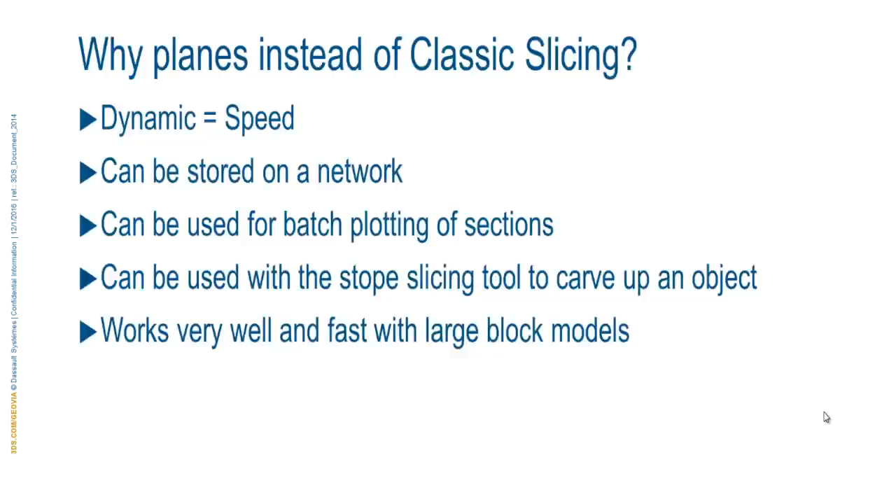On top of that, we have the plane's menu bar. Most of the options you will need when working with planes are on the toolbar, but there are a few planes functions hidden away in the planes menu that will also come in handy. The ones we'll look at today are the 3D work area.

Once you've defined a plane, the 3D work area allows a 3D grid to be drawn around any data currently open, and will also show us the active plane, which can be seen as a translucent object. This makes it very easy to see where the plane intersects with your data.

Another option we'll look at is create parallel planes. If you're creating oblique planes, you first need to define the oblique plane that all other parallel planes will be based off. Once that's done, creating the rest of the oblique planes is easy with this function—you just need to nominate how many parallel planes you want.

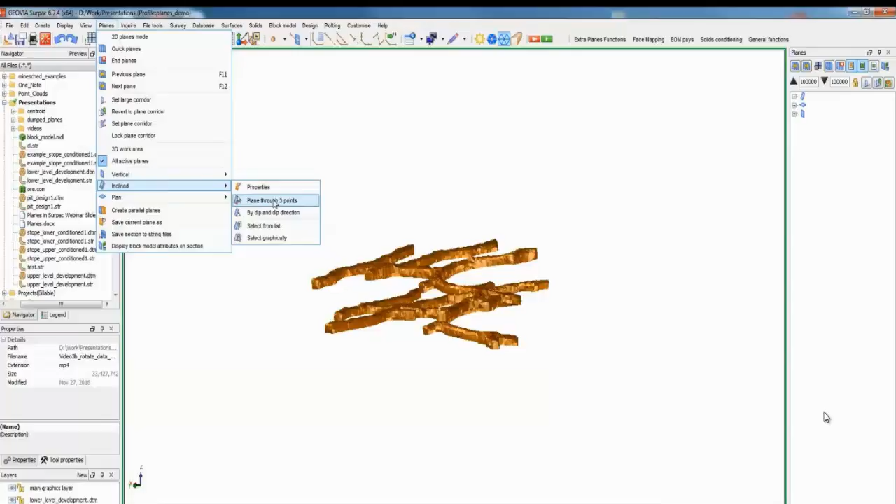A really quick one to start us off is to create a plane using 3 points. If I go to the inclined menu here, you can see there's an option to create a plane through 3 points—just click on that. What I want to do is create a plane from the floor of the upper level here, down to the backs on this lower level development.

When I'm doing this, if I press F1, it puts it in pause mode, and I can rotate my data around. Press escape to get out of pause, and then I can continue selecting my 3 points. I'll just choose those 3 points there. And now that's actually created.

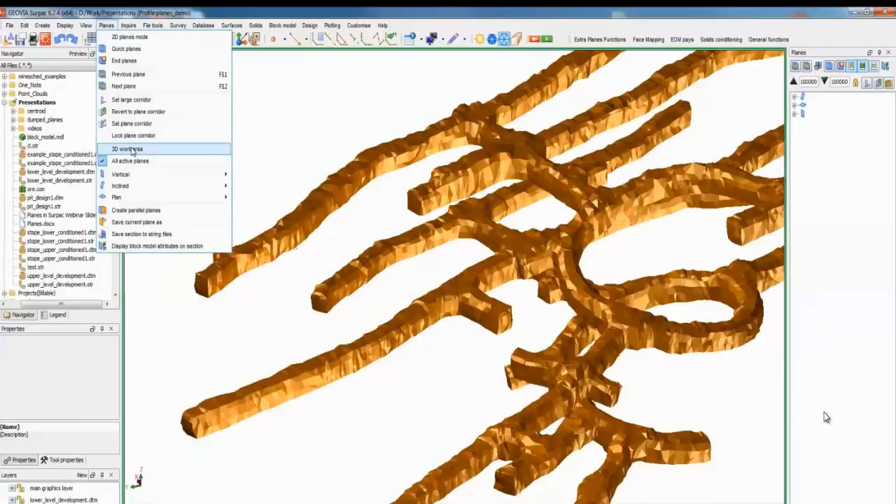You don't see anything on the screen at the moment because we're not actually in 3D work view. So to do that and see the plane, just come back up to the planes menu, go to the 3D work area, and we're going to set the 3D work area on the open data.

Now you can see the plane quite clearly as that translucent blue object. Now we have the plane there. It's not currently saved, it's still dynamic. So we can use it though for doing whatever we need to do. We don't have to actually save the plane.

So what I'll do is I'll digitize onto this plane just to show you how that's done, and then we'll go ahead and save that plane later on. So to digitize on it, maybe what I'll do is create a new layer, just call it the design layer.

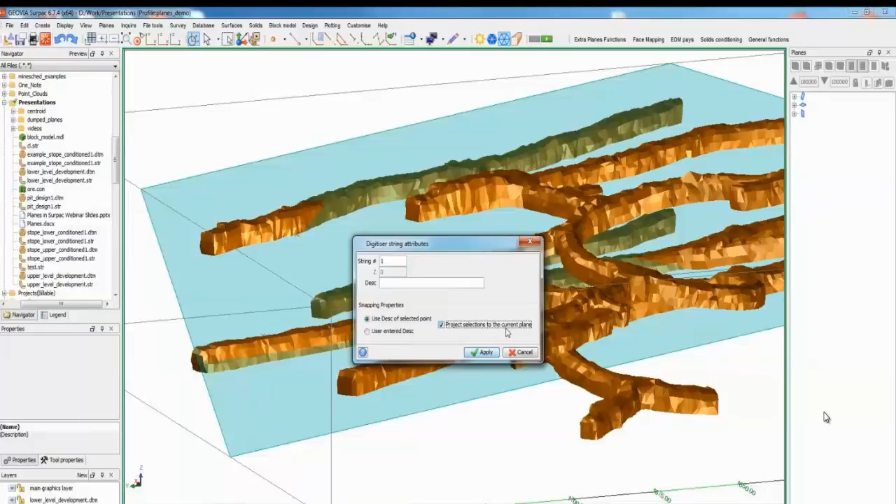The only thing I need to make sure I do before I start digitizing is just ensure that this little box here is checked. This is under the digitizer properties. So go in there, check that box, project selections to the current plane, press apply, and now all my digitizing will be pushed down onto that translucent blue plane.

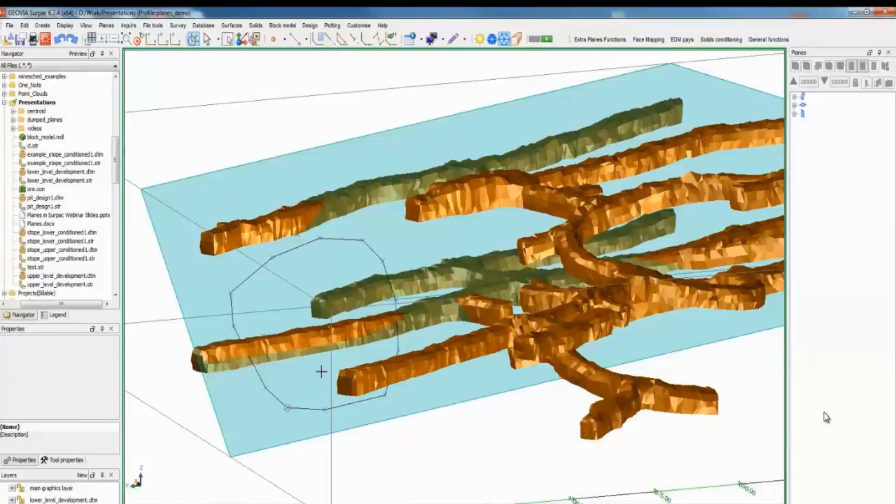So invoke my digitizer, either using D on the keyboard or create new points using the mouse. And then come along here, and I'm just going to digitize some random points around here so we can get an idea of how it works. 0 to close it off. And if I rotate that around, you'll see how that is actually digitized and pushed all those points down onto that particular plane.

So let's say, for instance, I wanted to actually save this plane, utilize it later on, come back to it. I have to save that particular plane to do that. So in the planes menu, come down to where it says save current plane as.

Let's just call it design 1. I've already got a group there called design, so design 1, and we'll call this plane number 1, and apply that. So this now has been saved.

And if I come over here to my inclined planes panel, this is for horizontal or plan view planes, and this is vertical, but these are my inclined ones. There's my design 1, and this number 1 here is the plane that we're looking at on the screen. So I can make that active just by double clicking on that. And when I do that, I can now use some of these tools up here.

So for instance, I might want to see just a polyline of where that plane intersects all my objects. So to see that, I just click on this little button here, and I'm now getting a polyline view. This is quite helpful if I'm doing any design work and I want to hide away the triangles and snap onto my virtual strings, because these are actually virtual strings. They're not slices. So that's how planes work so fast as well, because everything's done in a virtual string environment.

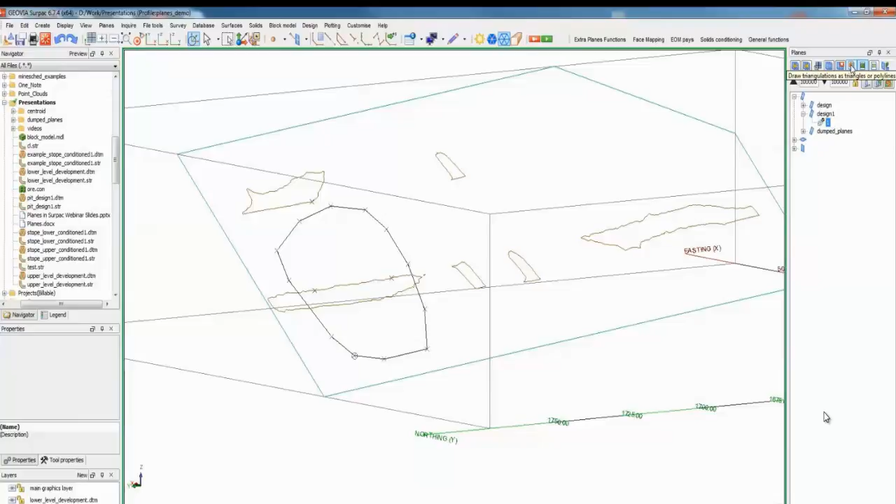If I want to get back to how it was before, I can just press this polyline one again, and it takes me back out to that.

Now, when I'm in the polyline environment, what I might want to do also is set my current plane to be in the 2D environment, and that allows me to utilize all my digitizing functions as well.

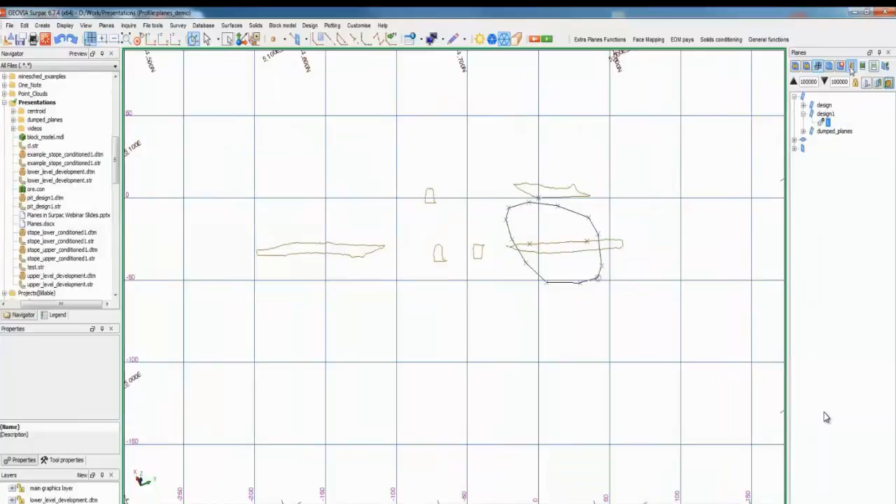Once I'm in here, you might also want to reverse the viewing direction of your plane. So if I click on this one here, it spins me around and reverses the viewing direction. Just click on it again to go back to the original viewing direction. And to get out of it all, just polylines again, and click on the 2D grid again, and we're back out to where we were before.

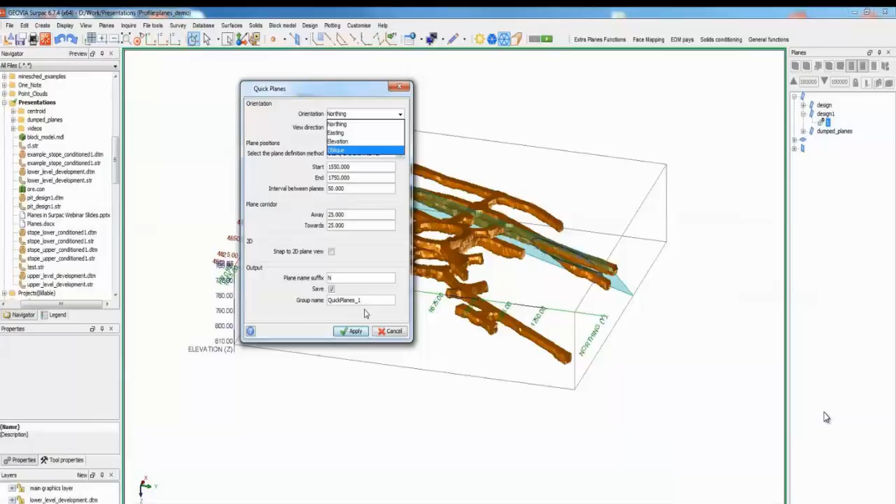So it's just a little introduction to planes. Some of the other planes functions which we'll cover are inside this quick planes menu here, and they're all the standard ones. So you can do a northing, easting, elevation, and then you can have your oblique planes here and create parallel planes from that as well. We'll cover those off as we go through this demonstration.

So the next demonstration will cover creating planes along a centre line. This is not a current function in the planes menu, but what you can do though is create a plane by dip and dip direction and store these values into points that are located anywhere you would like a plane. Using a small macro, we can then loop over all of those points and create a plane by using the stored definition. This works really well and saves a heap of time. We can also get the plane to dump forward, similar to the workflow of creating ring design slices.

So what I want to do now is show you how we can create planes along a centre line, a predetermined centre line. I've brought in my lower level development here. I've just got a stope object in here for interest, and you can see my black line coming across here.

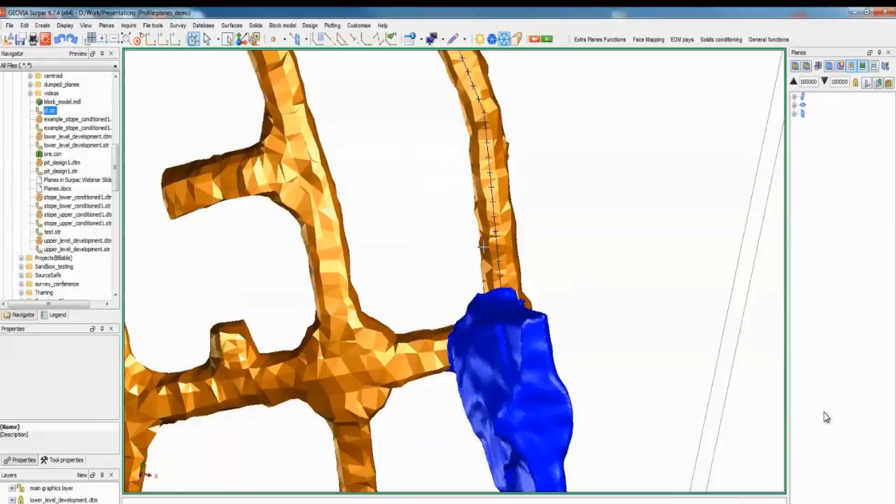This is the centre line that I want to create my planes along. I've already used another function to subdivide this particular centre line. So if I type in PM for plot markers, you can see that I've divided my centre line into even increments.

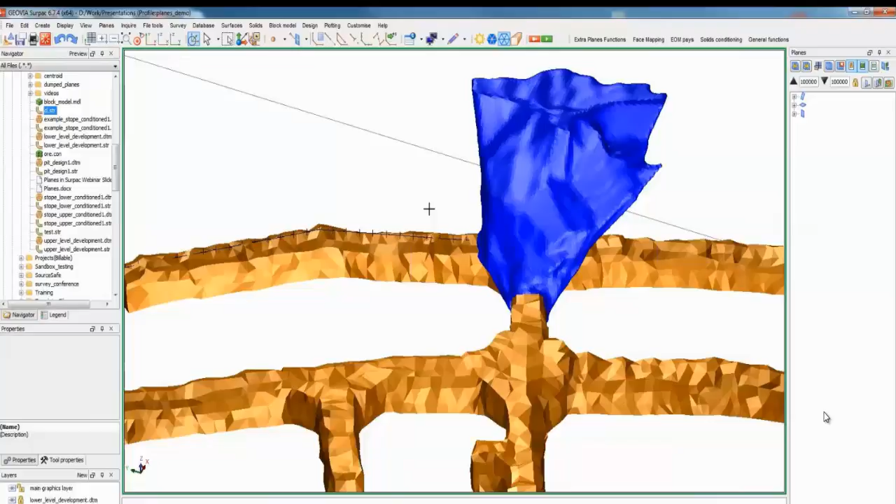Each one of these points represents where I would like a plane to be defined. So the way I'm trying to do it is to basically dump my plane forward in this direction. In this case, I want to dump it forward, say 20 degrees, and I need it to be perpendicular to that particular centre line.

I already know that my centre line is coming along an angle of 340 degrees, and I want my plane to be dumped forward with 20 degrees from the zenith. So what that means is that I need to specify a dip direction of 160 degrees and a dip angle of 70 degrees, and that will give me my desired result.

So to create this plane, I need to do it manually in Surpac at the moment, and I would have to actually do it for each one of these particular points along my centre line. If I wanted to create them all, I think there's about 32 points here, so that means I have to do this 32 times as it currently stands.

What we've done is create a little macro that loops over each one of these points. We've already written the dip and dip direction into these points using some string math, and the macro extracts that information, puts it into the dip and dip direction planes function, and will automatically create those planes for me. So I'll show you how to do it manually first, and then how to do it using our automated script.

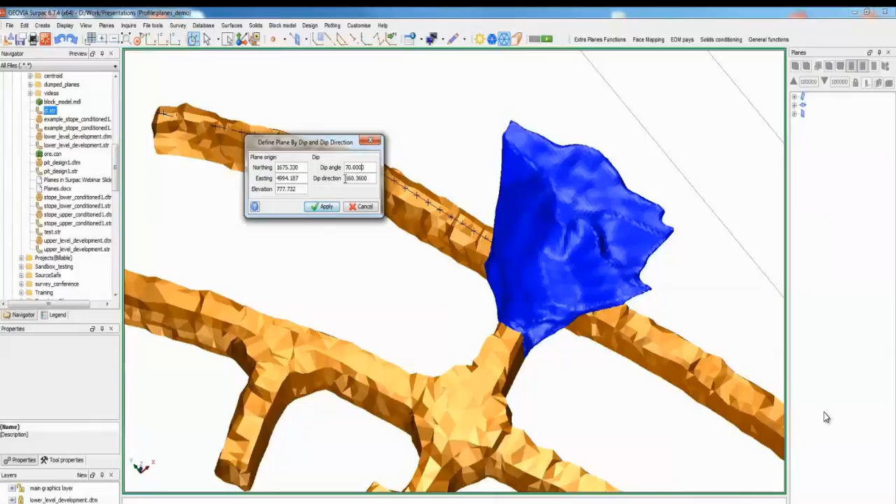So to do it manually first, we go to planes, and we go to inclined planes, by dip and dip direction. You'll see down the bottom here it says select the first point for the inclined plane. I'm just going to populate the dip angle and dip direction with 70 degrees and 160 as we discussed before, and then press apply. And there is my plane definition.

So you can see that it's perpendicular to my centre line, and it is dumping 20 degrees forward like I wanted it to. As we spoke about before, I would have to then go to the next one and the next one and use that same function to create all these planes along the centre line. But we're not going to worry about that.

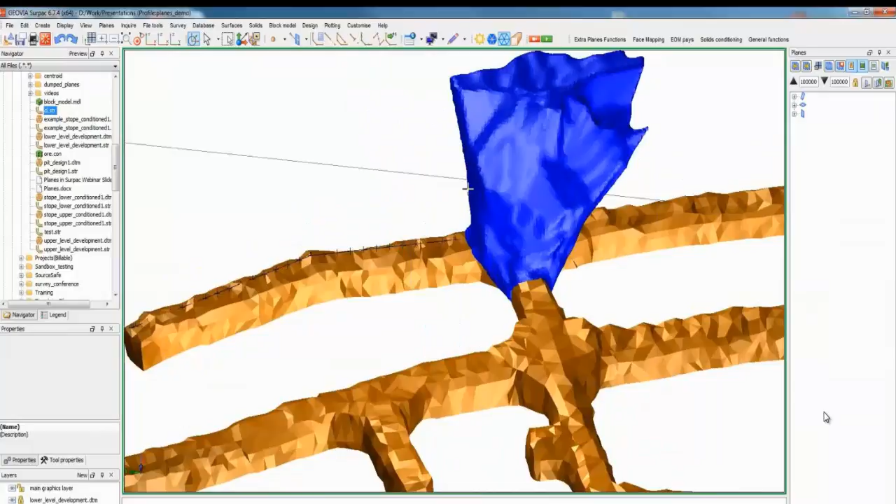We are going to use the automated function, which is under my extra planes menu here. So I need to be able to see my actual centre line string, the first and last point on that when I run this function.

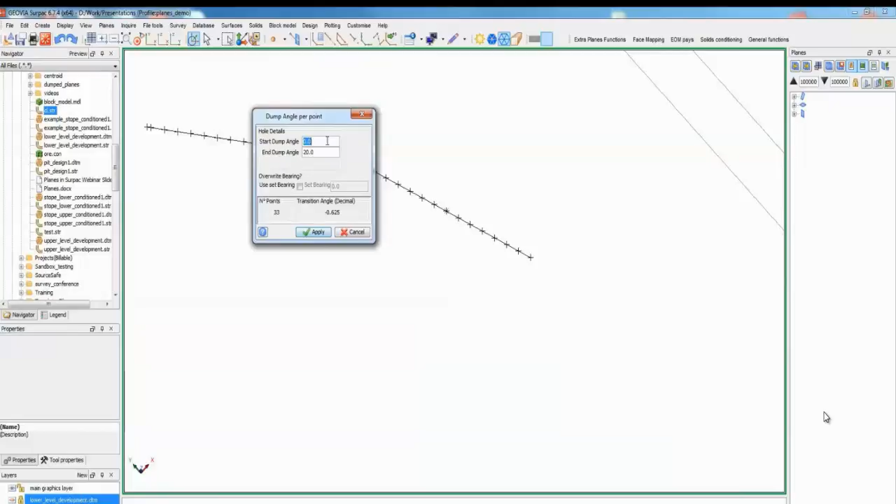So I'll just click on extra planes and create planes at any dump angle. It's going to create it from these user inputs that I've told you about before. We're going to start our dump at 0, so at the zenith, and it's going to progressively travel through to the very end point, which is point number 33 on this string, and that'll be a final dump angle of 20 degrees.

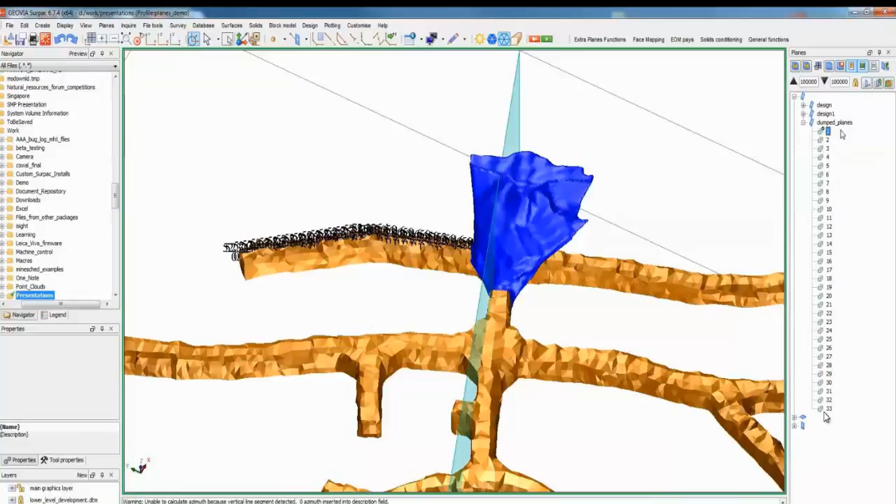Now that that's done, I'll bring back my objects so you can see them, and let's now visualize those planes. So that's been created - they are inclined planes. You can see I've got a plane group here called dumped planes, starting at 1, going all the way to 33. I can start at, say, number 1 here - you can see that it's a vertical plane. And as we go through these planes, they should progressively dip over.

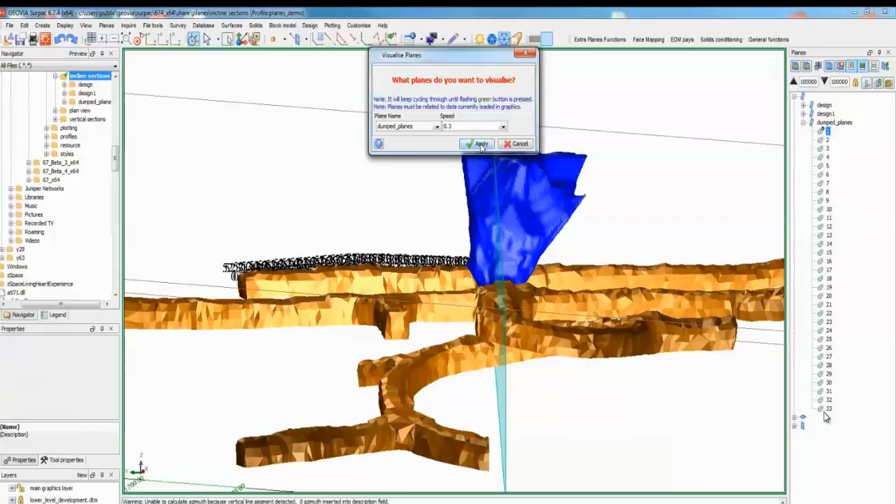So let's visualize these using another automated function we've written - visualize planes. We're going to visualize the dumped planes at a speed of 0.3, press apply, and that will just travel through all these planes here. You can see that it's progressively dipping over. When it hits the final one there, that's where it'll be at the 20 degree mark.

So I'll spin my data around - you can see that it's sort of probably about the 10 or 11 degree mark there. I jump down to plane number 33, spin my data around - that's now at 20 degrees just there. So that's how we can create some planes along the center line.

It's sometimes necessary to move and rotate a solid in Surpac, but the traditional tools for doing this make it quite a hard task. Once you've defined a plane, rotating the data about the plane is actually very easy. You just need to show the point markers that make up the object and use the edit, move string constrained by rotation function. This next demonstration will show you how it's done.

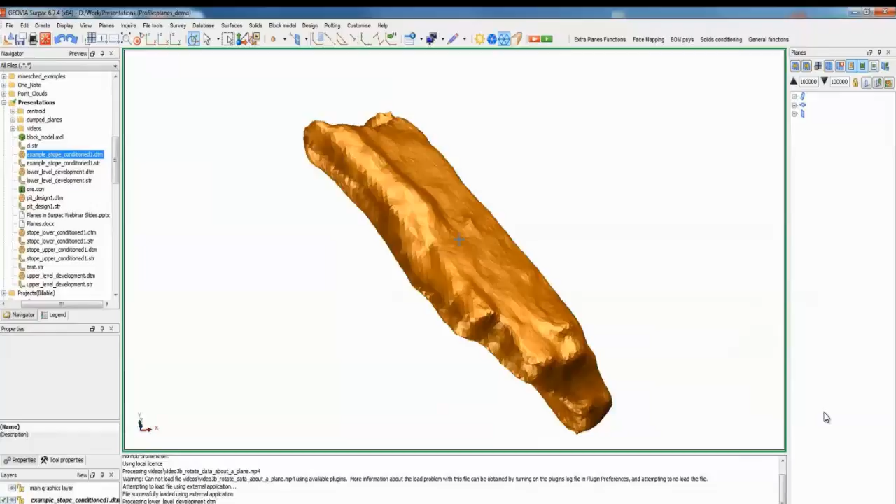What I want to demonstrate now is just how we can rotate data, an object, or a solid using planes functionality. So the plane type that I'll set up will be just plane through 3 points, and I'll be using this shape here, this CMS shape. One of the first things I'll do before I activate my plane is I'll just put out my markers, and you'll see the reason for that in a second.

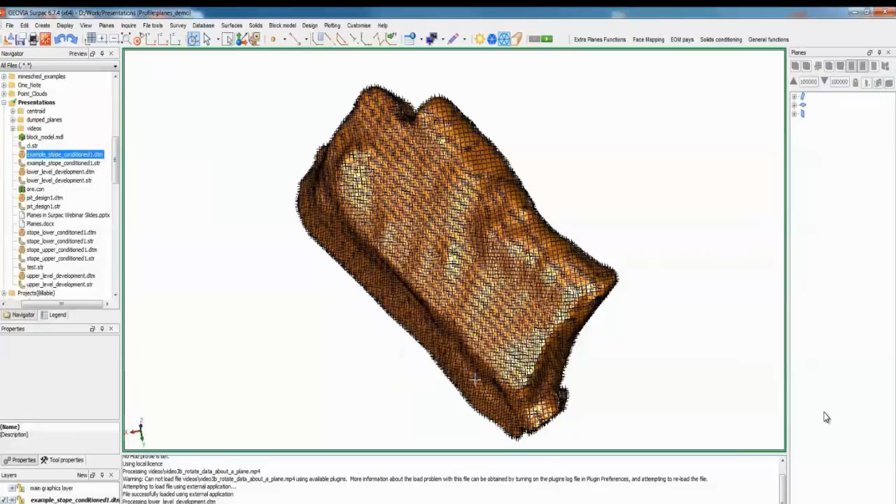Now if I just go through planes, inclined, plane through 3 points, and let's just click somewhere here, somewhere there - so I've now defined my 3 points. Going on what we've learnt so far, I can go back to planes menu, click on my 3D work area, open that up, and if I rotate that around, just so you can have a look, you can see here I've got my plane definition going through those 3 points just along the back edge of this stope.

So I want to rotate my data about that angle, and the way that I do that, and the reason for bringing the markers up, is that my triangles are all part of, or all attached to a string file. Essentially that string file is made up of lines, segments, and points, and I want to be able to rotate using that string file and have all the triangles follow it.

So I'm in the DTM layer, which is what I should be in, and I'm going to use a function called edit - down the bottom here, we've got move string constrained by rotation. It says digitize the pivot point to rotate about, and I can just come over here, click somewhere in the middle of the object, and then I can click and drag about that pivot point.

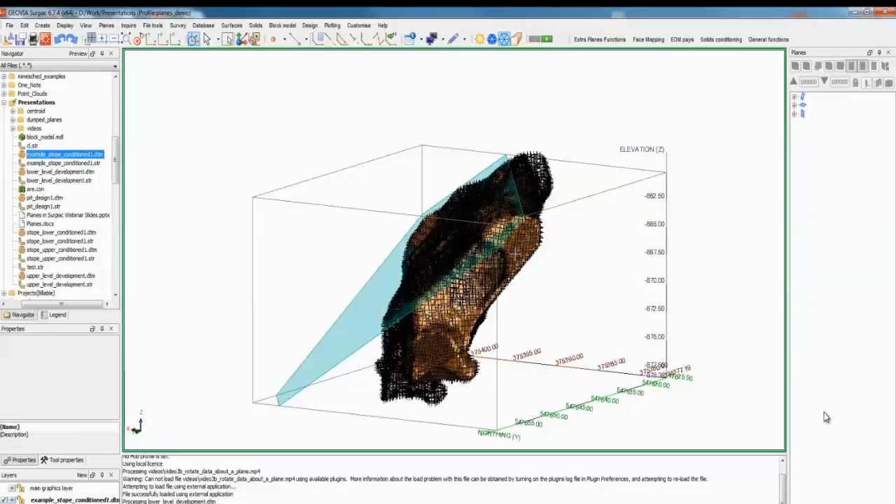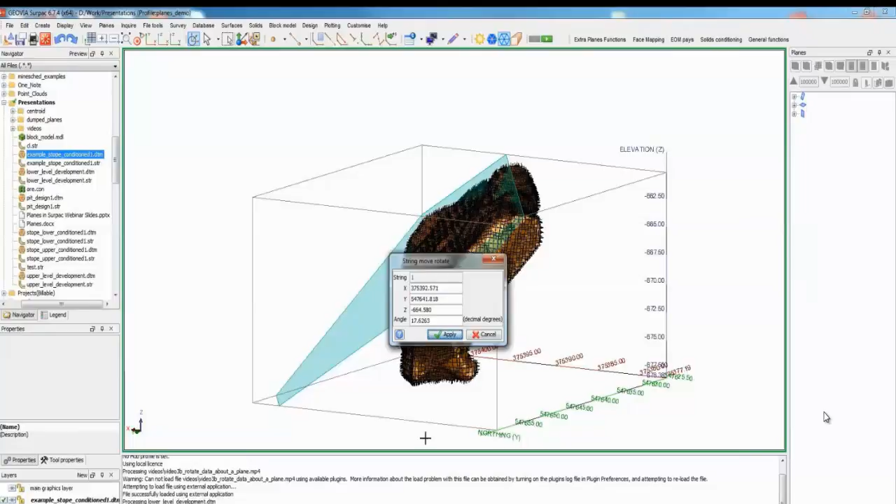But you'll notice that it stays constrained to the actual plane. If I rotate or drag my mouse up and down like that, you can see that it's sticking to that plane. Doesn't matter how far to the right or left I drag my mouse, it's staying to that plane. Same if I go up and down, it's staying to that plane. So let's just rotate it down here somewhere, let go. It says this is the angle that you're going to shift it, that's fine. Press apply, and you'll see that it's actually shifted about that plane - it's dragged that down, rotated that down.

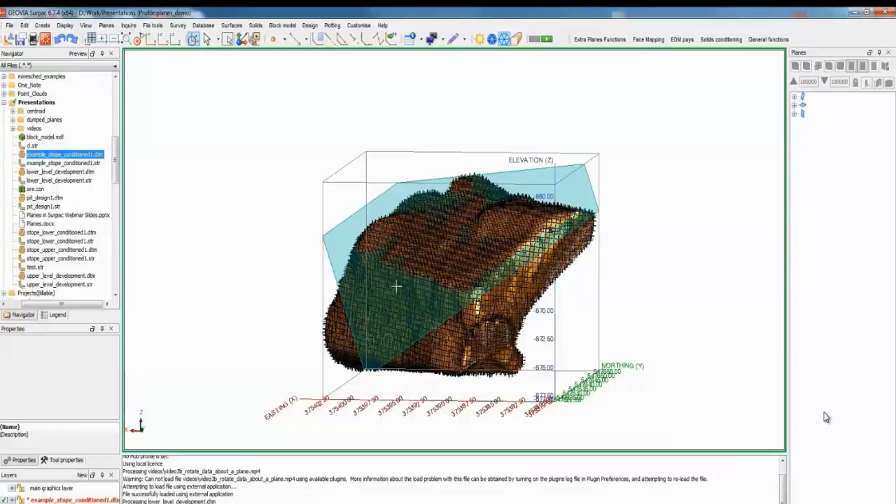So now what I want to do is change it again and rotate it around on this side of the object. Let's just create another plane through 3 points, and I'll choose somewhere here, and somewhere there. Let's just rotate our data so we can get a better view of how it's spinning, and let's go back to that function.

So edit, move string constrained by rotation. Click somewhere in the middle, and then anywhere else to just rotate - you can see it's now rotating about that plane there. Apply that change, and there it is. So another very handy feature to do with planes, because it's very hard to actually do that with any other type of function inside Surpac.

This next demonstration shows how to create a section string file through all visible objects using a stored planes definition. I also discuss how to use the drafting tool with virtual strings, which can make tasks like slicing a CMS very easy. What's even better is the fact that the objects don't need to be valid to create slices of them.

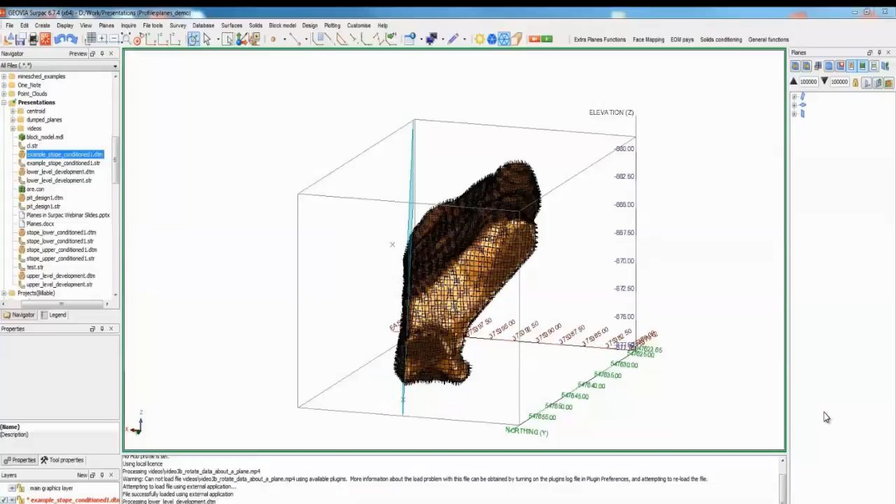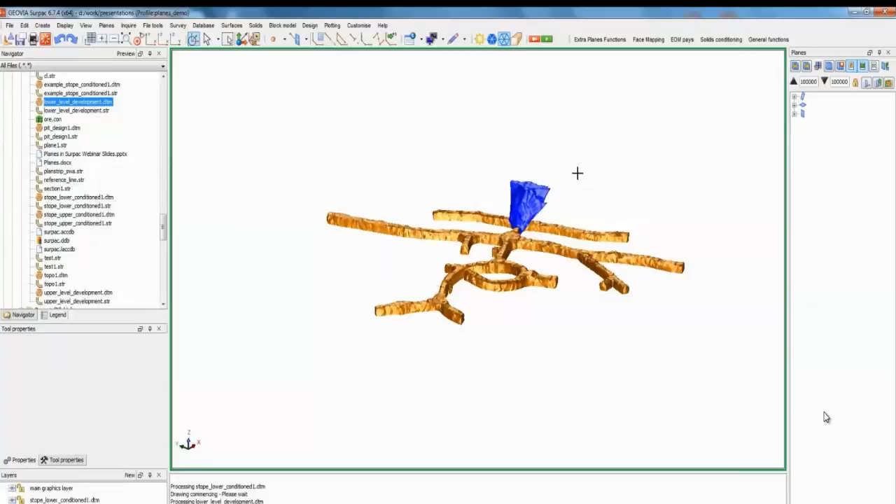So what I want to do now is show you how we can create slices of our data through the objects. I'll bring in my stope and my lower level development. We're going to be using some planes that have already been stored, just to show you how we can put these on a network or share them with colleagues so anyone has access to them.

So the actual planes we're going to use are the ones we created before, which are just the dumped planes. I'll bring those out and have a look at plane number 1. The corridor definition of plane number 1 is very wide at the moment, so I'm going to set that to 1 and 1 to give you a better idea. Then if I put that into 2D view, we can even draw the polylines for it, and you can see we have our section.

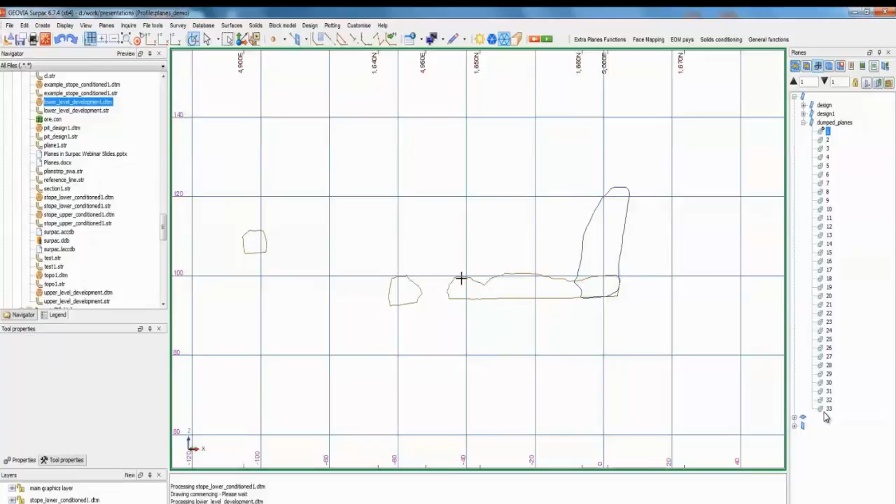So when this gets saved out, my section string file will honour the object number or the string number of the sections that get saved. In other words, any object with object number 1 will create a string in the section file as string number 1, object 2 will be string number 2, and so on.

I also want to show you, before we save a single section, how we can use the virtual strings, which is what these are on the screen, to snap to and do things like digitizing work and even use something called the drafting tool.

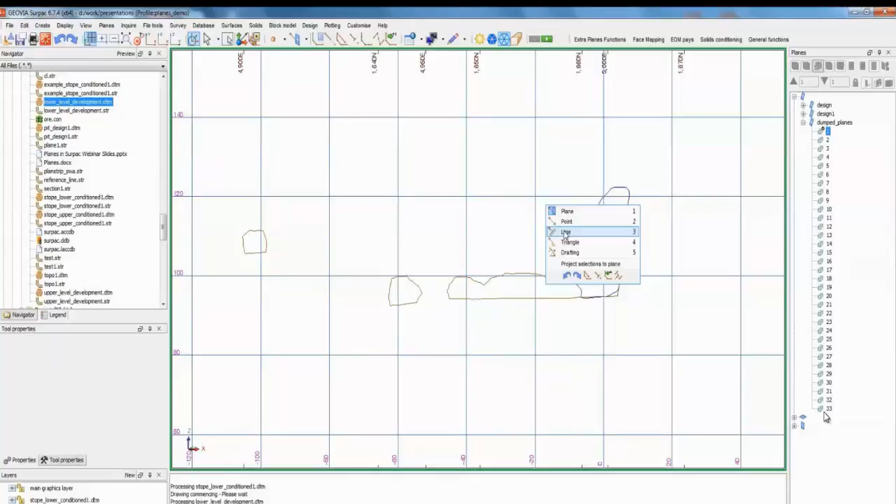So what I'll do is invoke my digitizer. I'll right click on the screen and set it to snap to line mode, and digitize a point on that line. You'll see as I drag my mouse around, it's snapping to the actual line. I'll digitize a couple of points going around here, roughly, and when I get to the left hand side of this shape, I'll show you how we can do the drafting tool.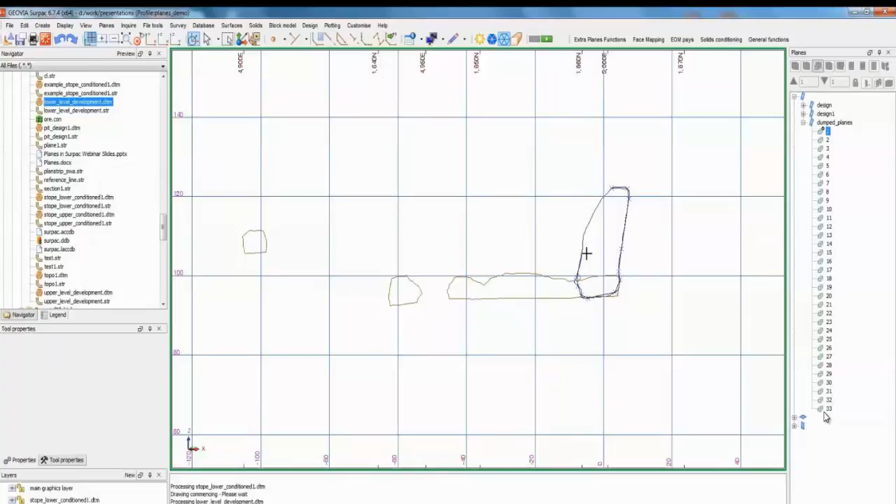If I pause there and right click on the screen, then drafting, you'll see some measurements come up on the screen. I've got a distance of 6 and an angle of 95 at the moment. As I go around, the angle increases, based off this line here that I've just finished digitizing.

If I want to do my offset snap, which is what I want to do here, I need to hold down Control and right click on the segment or string I want to offset from, and that's highlighted in green. As I move my mouse out, you'll see that measurement continues on. So that's 11 meters there.

So I can now digitize at an even increment, and this distance can be whatever I want. You set those distances in the tool properties box, where you have a distance for offset snap, distance snap, and angle snap. I'm just going to roughly digitize up here. You can see the points getting created at those even increments, 11 meters all the way there, 10 meters coming in, 9 meters, 8 meters.

So this is a really good way if you were doing some sort of stope design, had your block model up, and needed to make sure you were honouring a minimum mining width. You can use the offset tool with drafting.

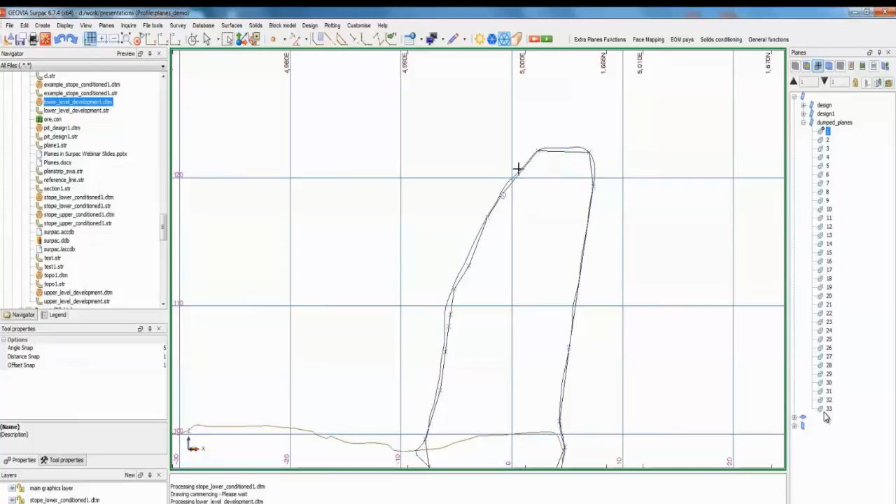So now that I've created that, I could do whatever I wanted with it, but I don't need that string. I just wanted to show you what was possible there. So I'm actually going to delete that, edit segment delete.

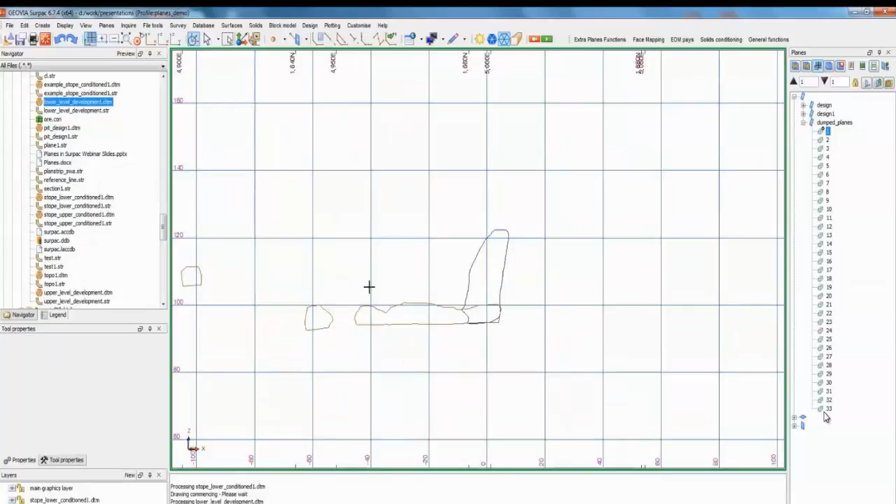Now what I'm going to do is show you how we can save out this virtual string to a section string file and possibly use that for whatever we want. To do that, I'll jump out of my planes definition, and I still have plane number 1 as the active one, section number 1 as active, sorry.

So I'm going to now run a function called planes, save section to string file, and let's just call this plane 1, and then apply. One already exists, so I'm just going to override that, that's fine.

So that one's been created for me, so let's just go and find that in our navigator. Here it is, let's drag that in and find it. And you can see that plane number 1 has now been created as a string file.

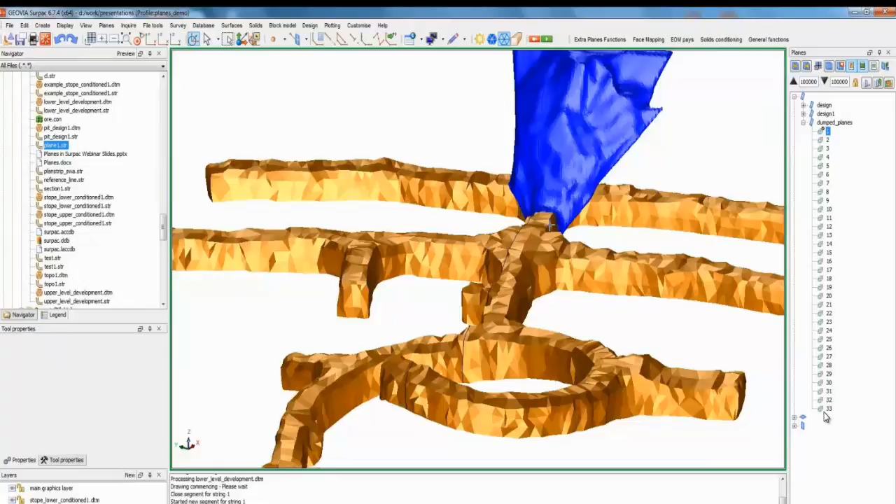So if I hide away my lower stope and lower level development, you can see the actual string itself has come through. You'll also notice that object number 1 has been created as string number 1, and object 2 is string number 2. So if I just do an inquire point properties, you'll see that.

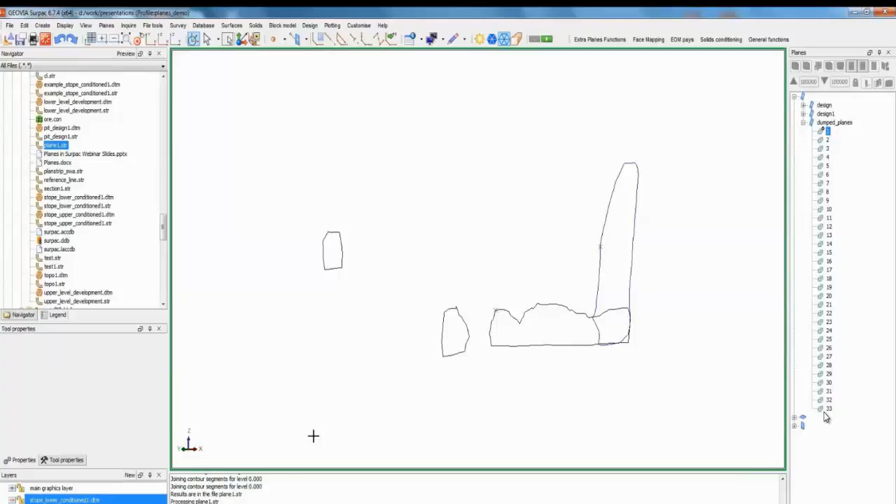So if I was to create sections of all these individual planes, I would have to double click on the next one, go into my planes, come down here and go save section string file. Obviously that's going to take quite a while if I've got a lot of planes like I have in this group, 33 of them. So what we did was create a little macro that will loop over all of these planes and run that function, saving it out into a particular folder.

So if I just enter my plane definition and bring back my objects, and I'll even get rid of this string file here, delete it from there, and delete it from my navigator. And let's create a whole bunch of strings into a dumped planes folder. I had created these ones before, so I'll just delete that folder and get rid of it so we can see it happening again.

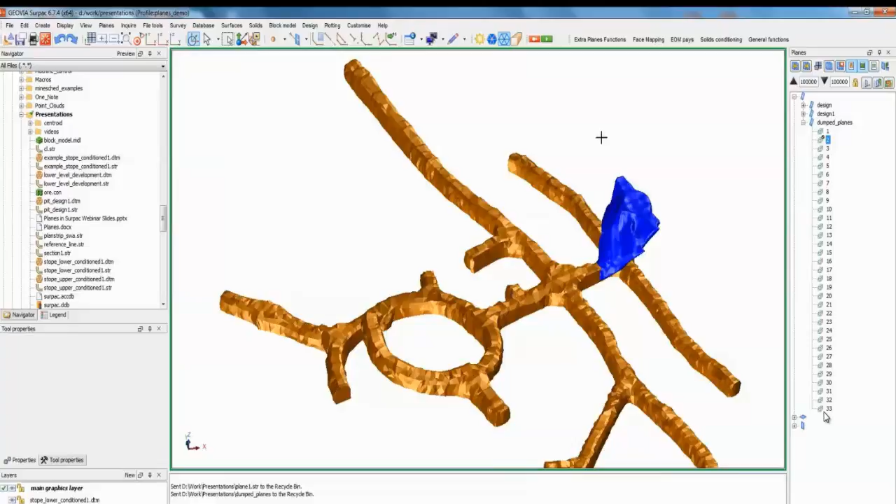So if I now go into my extra planes functions, I'm going to create sections through objects using planes, inclined, because that's what these ones here are - they're all in an inclined plane group. Click on that one, choose the plane group I want to create them from, which is dumped planes, and then I just type the folder name of all the section strings where that's going to be created. I'll also create that into a dumped planes folder and press apply.

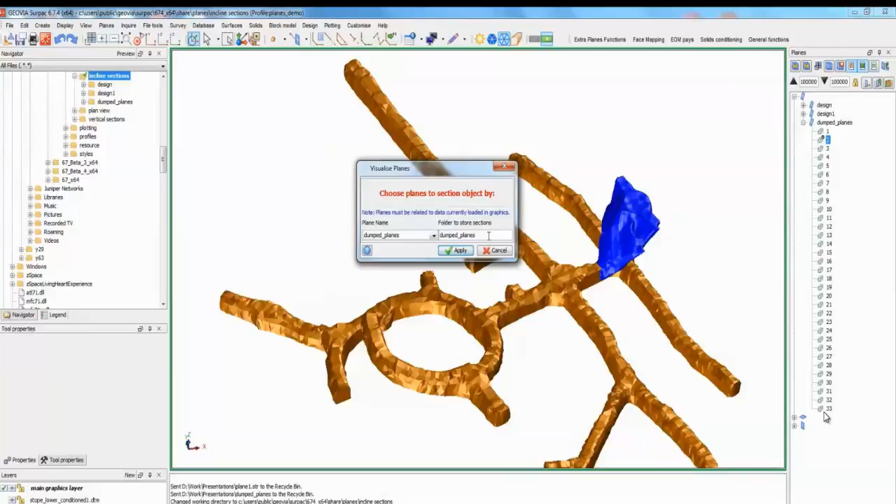You'll see Surpac will iterate through all the planes listed on the right hand side in the plane group, dumped planes. Each time it's looping through, it's using that function, save section to string file, and it's creating these planes as a section string file for me in that folder we just created.

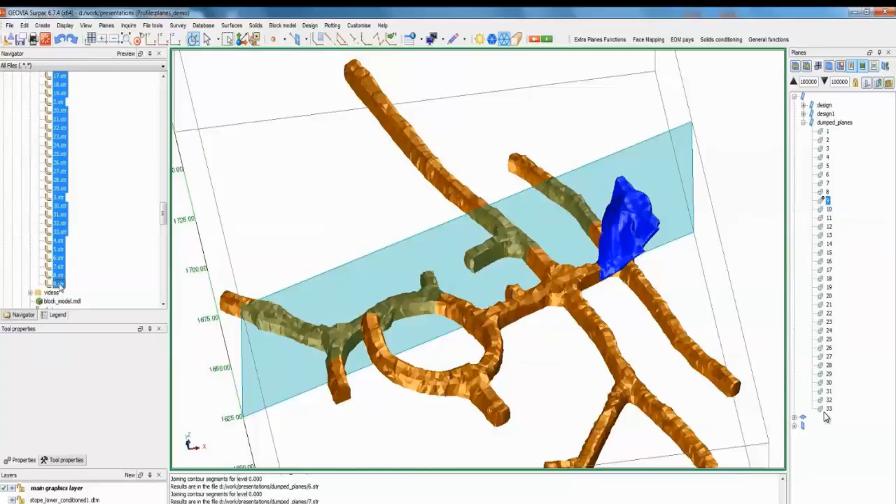So if I now go over to my dumped planes folder, you'll see that I've got from 1 to 33, which is there. Let's just bring all of those in. My main graphics layer is already set, so if I drag those in, holding down Control, all of these will be brought into my main graphics layer.

And now that's done, let's just hide away my objects again. I'll even enter my plane definition, and there's all the strings there. So let's say, for example, I was only interested in this drive coming out through here, all these dump strings - I wasn't interested in any of this. What I can do is use my box select tool.

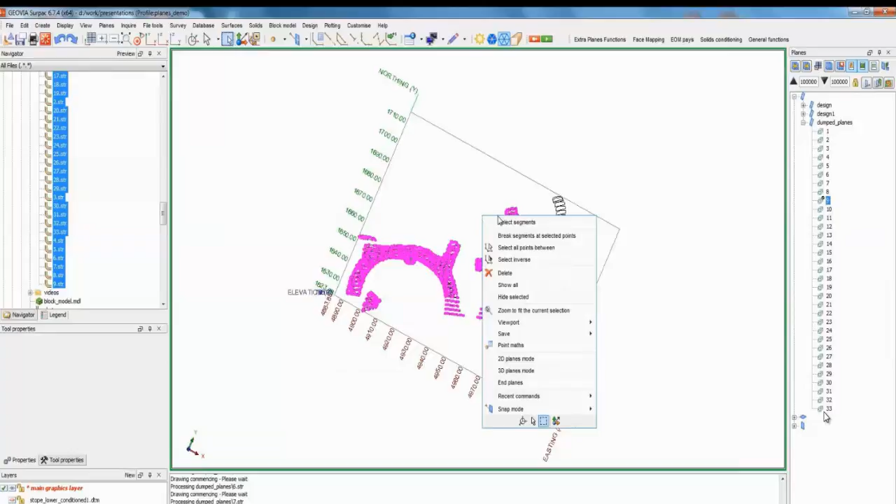So if I rotate my data around so that I can select it easily, I can then use this function up the top here called box select points. Click on that one, drag a box around the data that I don't want, and then right click on the screen once it's selected and press delete. And they all get deleted off the screen.

So that's just a good demonstration of how we can save out section to string file, and we can also use the automated function that you can get in the free installer kit. Just email me some details and I'll send it on to you.

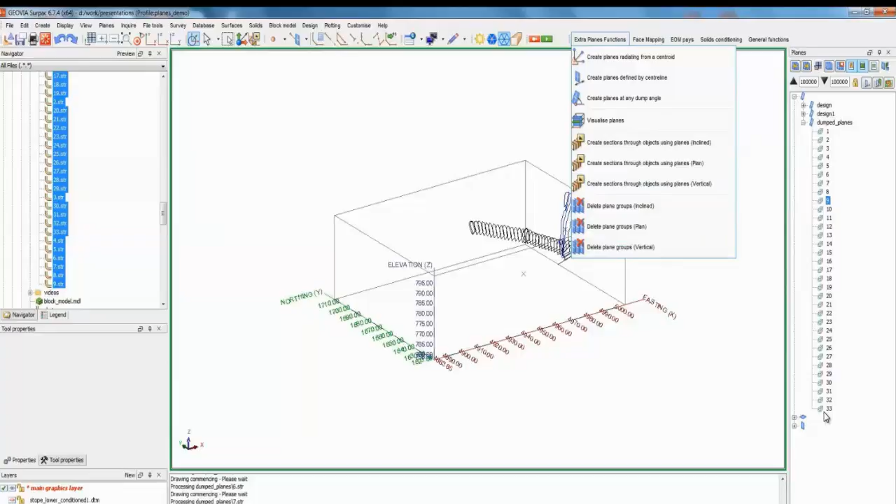So I put this next demo in just to give you an idea of what can be done with the planes functionality with just a small amount of scripting. It was actually a customer request that we're able to do, and is also part of the free installer kit.

So here's an example of what we can do with just using some of the existing planes functionality in Surpac, along with a small amount of scripting. And if I just bring in my design, pit design here, what I am going to do is create planes that are going to rotate about a centroid.

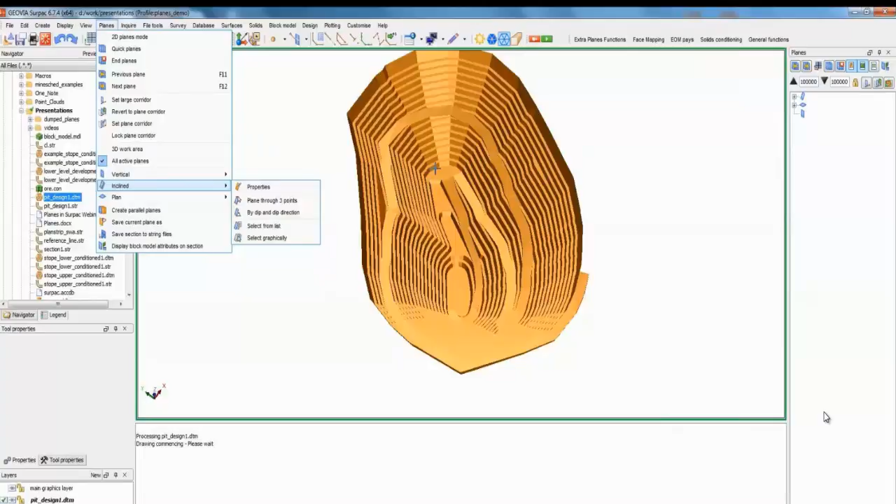Now, there's a number of different ways that I could do this manually, but probably the way you would do it is come into planes, go to inclined, and you'd be creating a whole bunch of planes using different dip and dip direction values. You can create all those manually and then have them all in a plane group and utilize them from there. But what we ended up doing was automating that process, and with a small amount of scripting created an extra plane function called create planes radiating from a centroid.

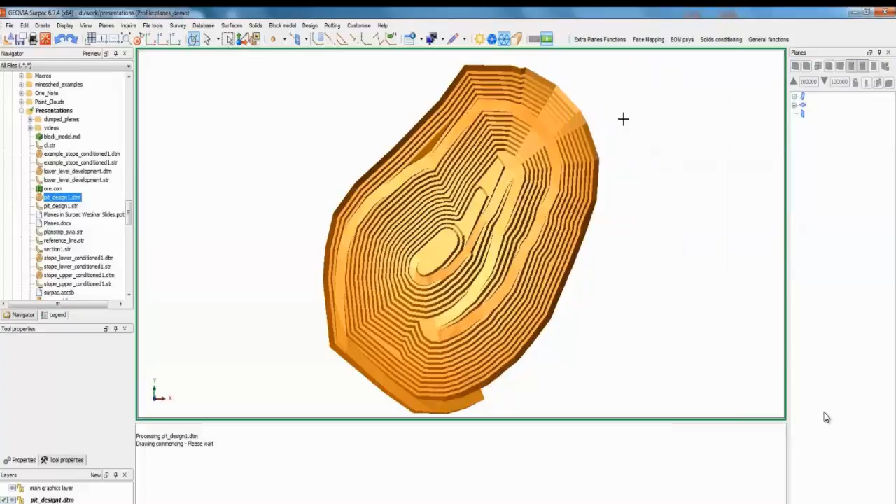So if I just run that function now, create planes radiating from a centroid, it just asks me to select the centroid position. You can choose anywhere in the object, it doesn't really matter, it's just going to be where the planes intersect. Now I'll give it a plane group name of centroid.

That's what's going to get created over here in the vertical planes. Don't need to worry about a suffix, it's optional. The bearing of the first plane is 0 degrees. If I have a bearing of 0, a step interval of 10 degrees, and a number of steps of 17, that basically is going to give me a 360 degree view of my pit in 10 degree increments. And you'll see how that works in just a second.

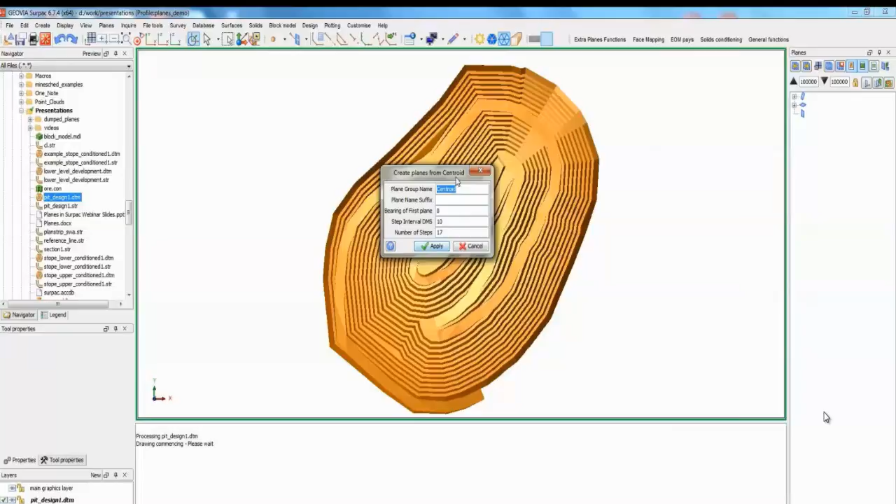So if I press apply on that, you can see how it's spinning around in the view there. It's finished on this plane here.

And if I go over to my planes definition, you can now see that in my vertical planes, I've got one called centroid, and in there I've got 0 right through. So every 10 degrees, one is getting created. 0 is the true north plane, so 0 to 180. 10 degrees over here is obviously 10 and 190. If I go down to 20, we've got 20 and 200, and so on.

So it's cutting right through the object through there, and using these planes now, we can obviously create section strings from them. So if I come up to my extra planes function, I can use this function here called create sections through objects using planes, and that's the vertical one.

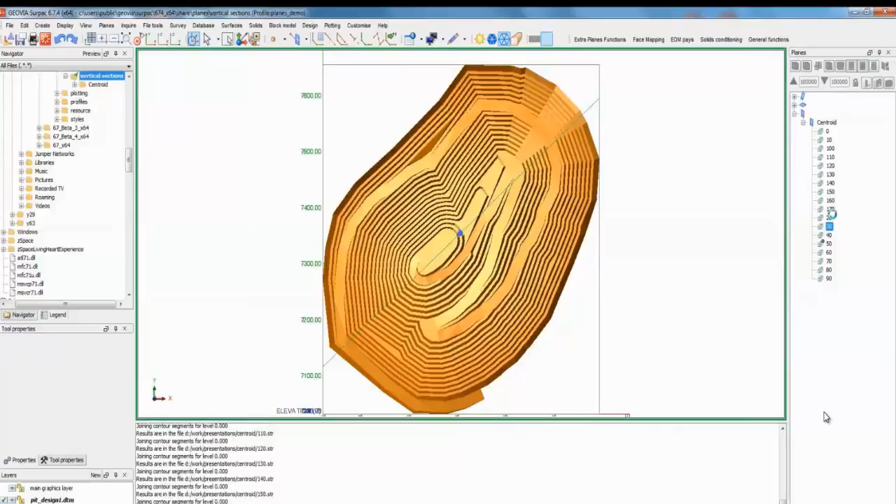Click on that, and I just choose my centroid plane group to create sections from. I'm going to put these in a folder also called centroid. And then just press apply. So Surpac's stepping through each one of these planes now. Each time it does, it'll create a new section string file for me. And over here, I've now got a folder called centroid.

And in there, I've got my plane definitions saved out as strings. So I'll just set my active layer to the main graphics layer, select all my strings, and I'll bring them all in

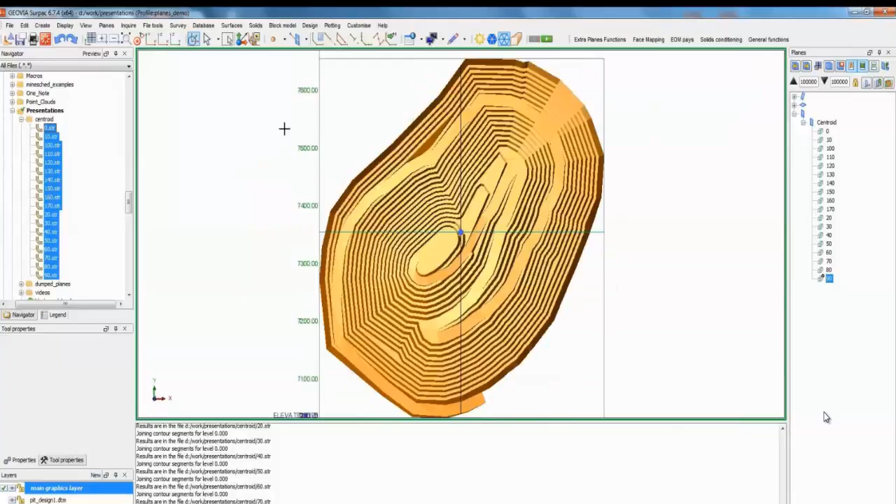so we can see what they look like. So I'm now set at the moment on my 90-degree plane. So if I go back into plan view, you can see that quite clearly on the screen. And you've got all my section strings going around my entire pit. So let's have a bit better look at that. Just by hiding my pit, you can see the strings showing there.

So this is just a small little example of how we can use existing planes functionality with a small amount of scripting and create a function for a client that's proved quite useful for them.

So using planes with a block model is really easy and very quick. In fact, this is where most of the speed improvements over classic slicing can be found. In this next demonstration, I'll show you how to display block outlines coloured by attribute, along with the grade value of the block displayed at the centre.

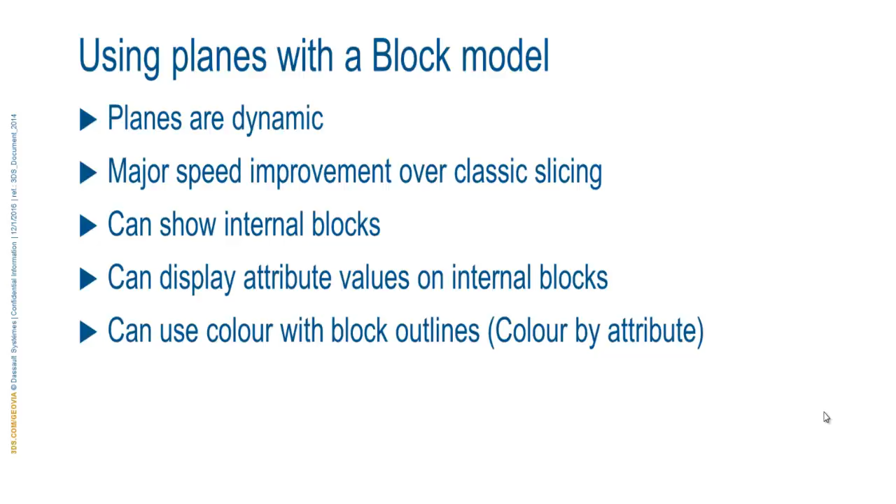So what I want to demonstrate now is how we can use our planes in conjunction with a block model. So I'll just bring in some design data to start off with, and then we'll connect to a block model, and then we'll just display all the blocks in the model.

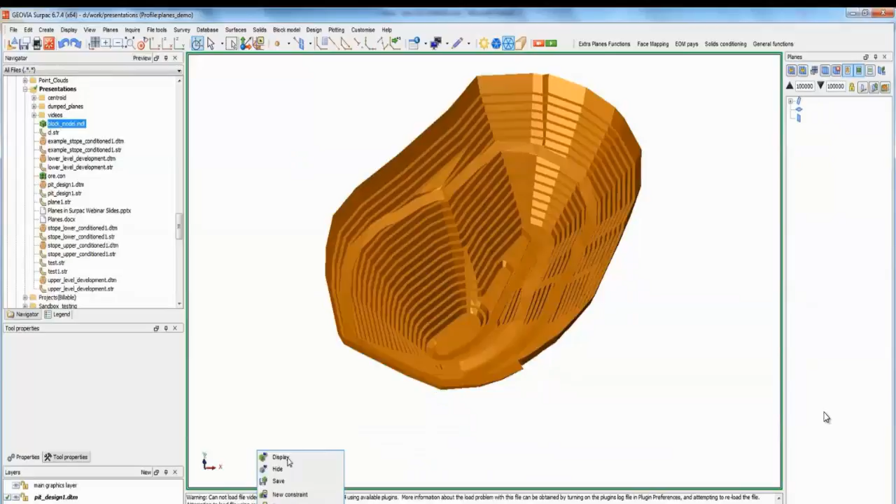But you'll notice here I'm not going to check this include internal blocks checkbox. What that will do is actually display, or Surpac will display all the internal blocks, even the ones that I can't see, which is quite memory intensive. But you'll see that when we use our planes, we'll still get access to all these internal blocks.

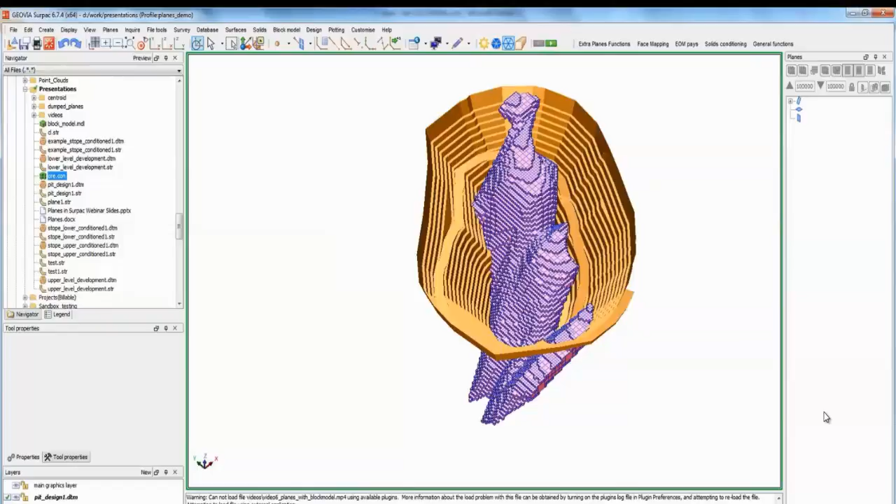So there's my model covering my design here, and I've created a constraint that I'll just drag into the graphics here. This is any block with some sort of grade in it will be displayed on my screen. And now what I want to do is just colour this model up by that gold attribute. That range is fine. Just press apply.

It'll give us an idea of how this works. So I've got some colour on my blocks. My model's loaded in constrained. Now what I want to do is use some of the functionality that's on my planes panel here to be able to view the internal blocks with the grade contained at the centroid of each of those blocks.

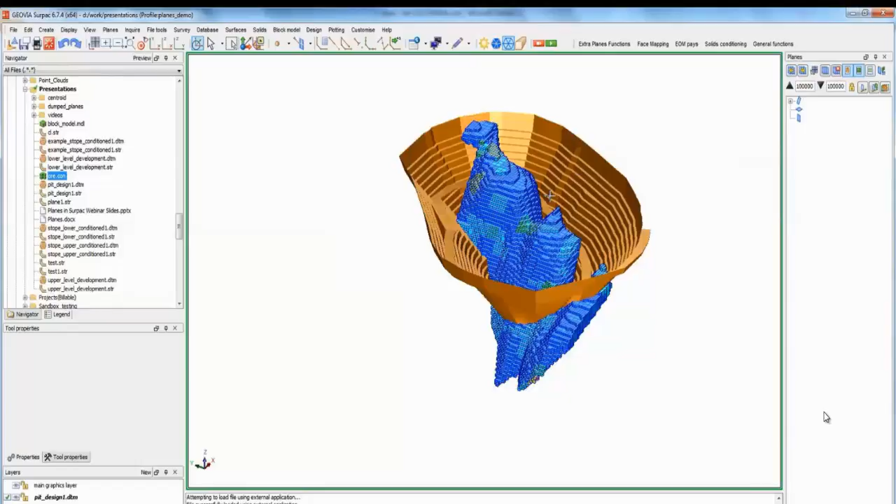Before I do that though, what I need to do is create some planes that will cover the data that I want. So I'll just work out the data extents.

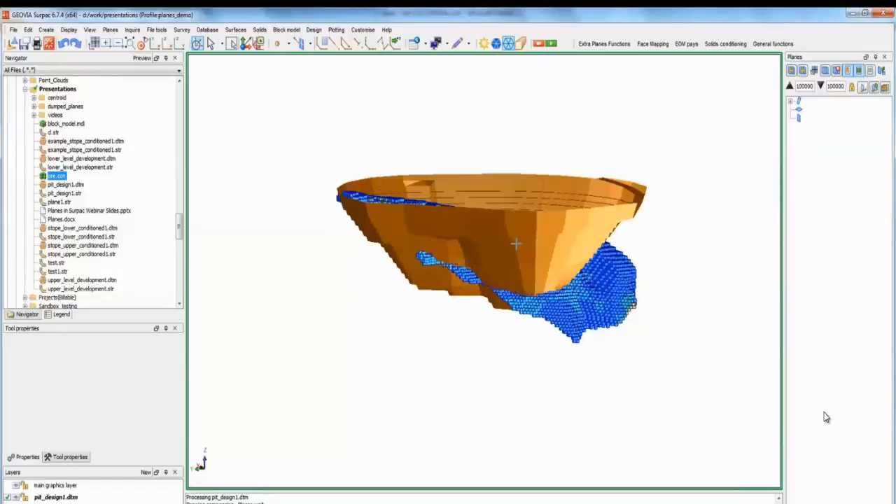You're looking at a minimum here of 45 to a maximum of 255 just by using the inquire report layer extents. So I don't want to create all those slices. I might just go from 100 to 200 every 10, because my bench height here is 10.

The way I can do that is either coming into this function here, which is quick planes, or you can get access to it through the menu as well. Clicking on quick planes there does the same thing. So I'll come into here, set it as elevation, and I'll do a start, end, and interval. My start will be 100, and we'll go to 200 every 10 to match our bench height, and I'll just get a 1 metre by 1 metre viewing corridor. Let's just call this plane group pit slices

Press apply. So you see over here on the right hand side in my planes panel, I've got my pit slices going from 100 to 200 every 10 metres, and I've got my slice coming through here like this. So let's jump to say the 150 elevation.

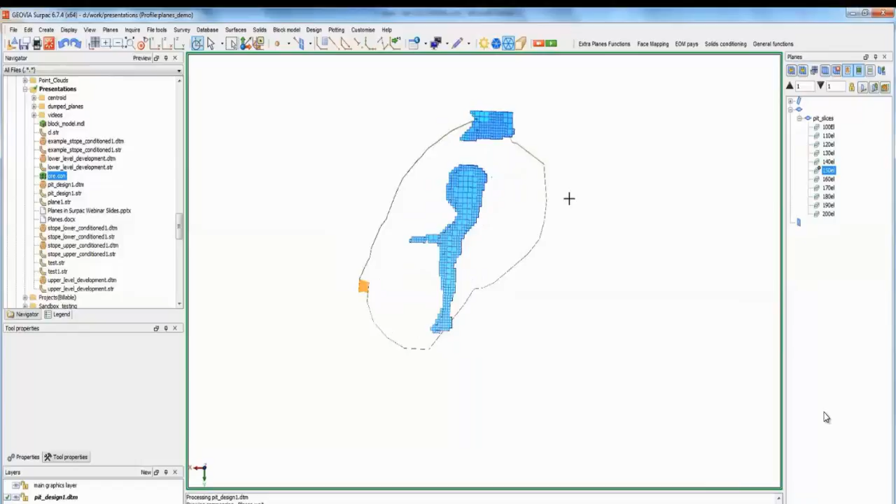Let's have a look at how we can view the grade at each one of those centroid positions in these blocks. So as I zoom in here, we've got our block outlines. So what I need to do is use some of this planes functionality up here.

The first one I'm going to use is to draw a block model as blocks or polylines. So if I click on this one, get to this shape here. And what I want to do now is apply a bit of shrinkage. So I'll just put in, say, 2.1 with my shrinkage. You can see that each of my blocks is now separated out.

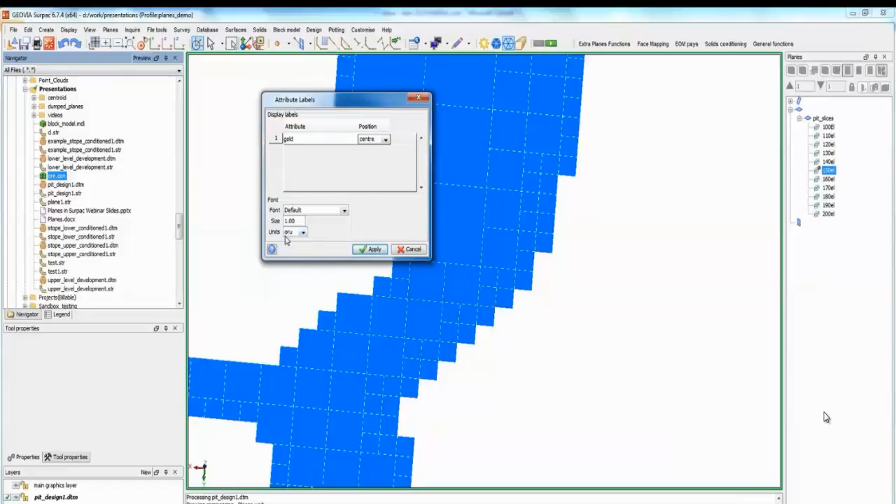This is helpful when we get to the next step where our block outlines are just displayed as strings. We're not going to have any overlap of colours where we've got two different grade values sitting next to each other. So I'll come into my next icon here, which is display attributes on section. Click on this one, and we're doing the gold attribute at the center, object relative units, and apply that.

Okay, so you can see now that at the centroid of each of my blocks, I've got some grade range specified in there. So that's just a few little tips and tricks with how to display some grade values at the centroid of each block. Now, of course, if you want to back out from all that and get a full view of all your data, you can just use the Set Large Projection button, and you can see how that actually sits inside your pit.

So now that we know how to display grades and block outlines using planes, we can take it a step further and split the viewport so that we can utilise a 3D view in one viewport and a 2D view in the other. When I perform tasks such as digitising in the 2D viewport, Surpac will automatically update the 3D viewport, allowing for a more comprehensive view of the work I'm doing.

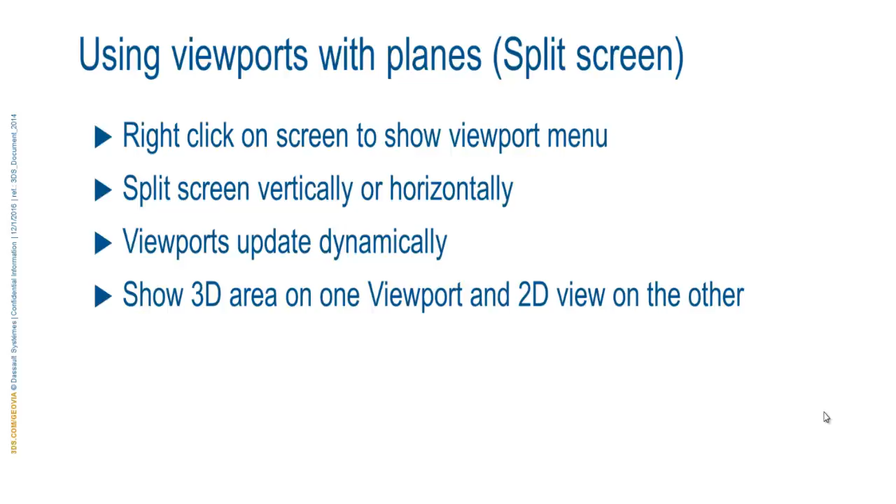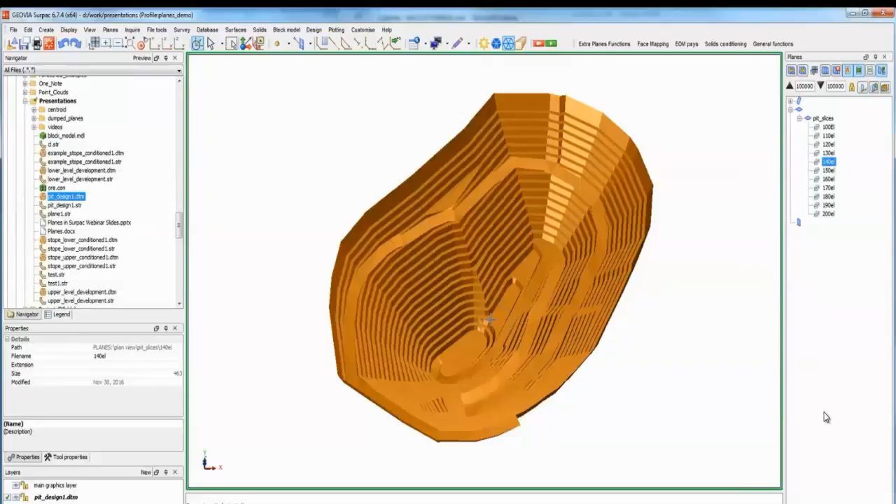So what I want to do now is show you how we can utilise planes with splitting the viewport so that I can be doing work on one viewport and seeing a dynamic update happen on the other viewport. In this example, what I'll do is I'll bring in my design and I'll display my block model.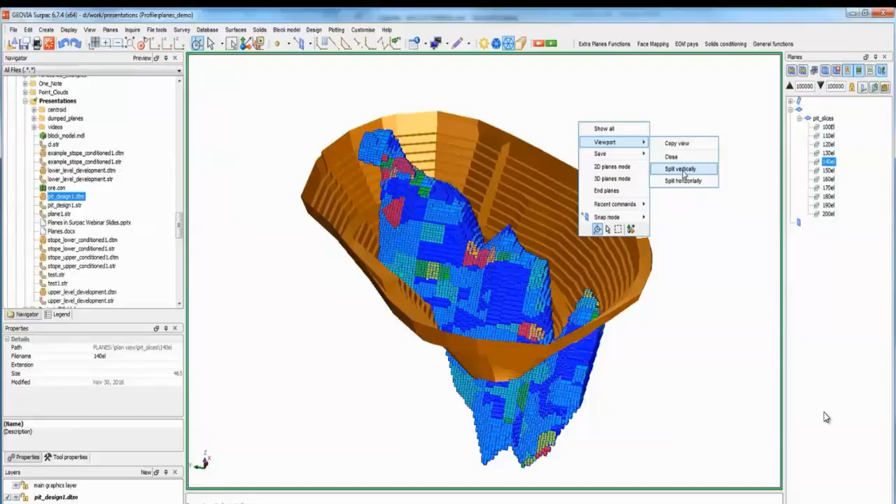And while I've got it at this point, I'm going to split my viewport. So if I right click on the screen, you'll see there's a viewport menu that appears, and I've got some options here, and the option that I'm going to choose now is to split vertically, although I could split it horizontally if I wished. And this gives me an identical view of my data in both viewports.

So once we get it to this point, what we need to do is actually pay attention to this green outline that's around my right-hand viewport at the moment. This is telling me that the right-hand viewport is actually the active viewport, and I can change which one is active just by left-clicking in either viewport. Now, the reason that's important is because when I start using the icons and functions on my planes panel, it is going to work only on the active viewport that I set beforehand.

Now, before I do any work in the planes panel, I'm going to open my 3D work area. So if I click on 3D work area on the open data, this will affect both viewports, and it opens them both up. And what I want to do is have my left-hand viewport show me a three-dimensional view of my data and my blocks in space. And on my right-hand viewport is where I want to be doing some digitising.

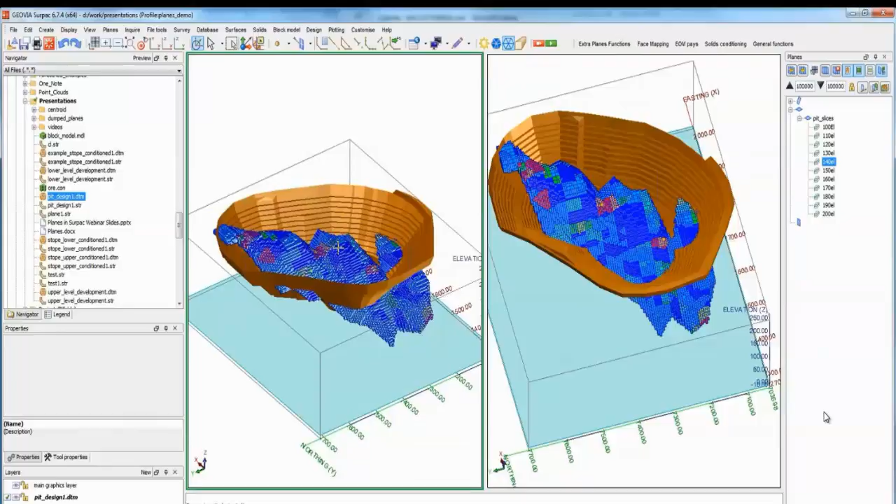So I'm going to work on the 140 elevation for both. So on my left-hand viewport, I'll double-click here, and that'll take me to the slice. And what I'll need to do to bring back my 3D work area is just to set large projections.

So I've set my large projections here, got my 3D view, so I'm happy with that. On the right-hand viewport now, it's also set at the 140 elevation. And I'm going to put that into the 2D view just by clicking on this button here.

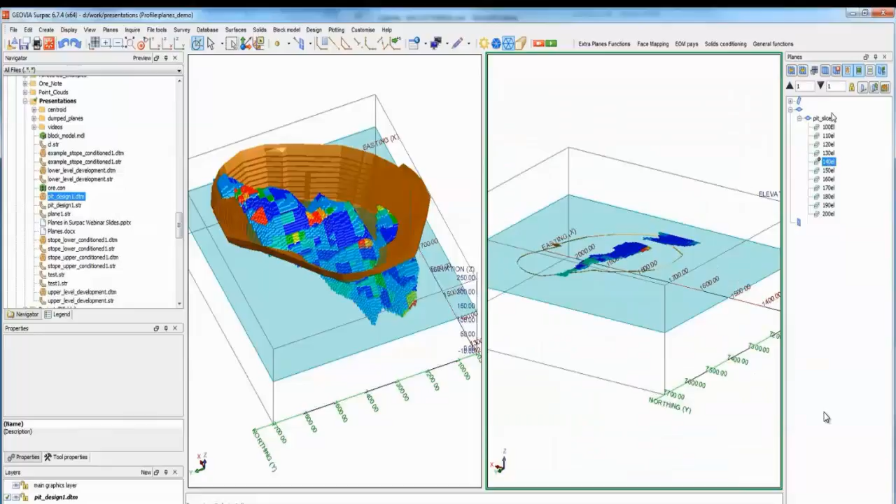So now I'm in 2D view. I want to run through the same process as we've done before, which is to change those into blocks and then apply some shrinkage.

Now that I've applied that, I'm going to display my grade attribute at the center. So choose my attribute, position center, apply that form, and now I can see all my grades. So this is pretty much how I want my view to be.

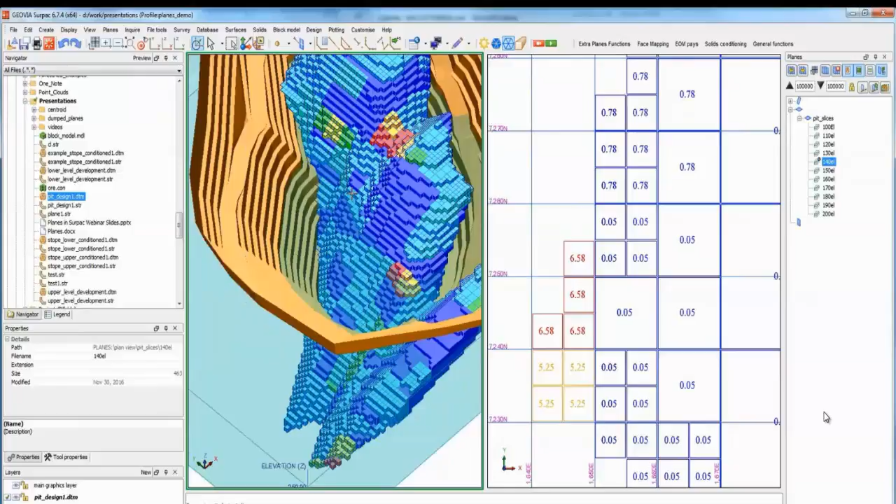I'm just going to now digitize in this right-hand viewport, and I should get the updated digitising line come through on my left-hand viewport here. So before I do that though, I want to just increase the thickness of my digitising line so it's much easier to see. So I can go into my styles,

Change the thickness of string 1, apply that, and now that's done, I'll go into my digitiser, and let's just start digitising a line from here, and you'll see down on the left-hand viewport, this is where it's dynamically updating just through here.

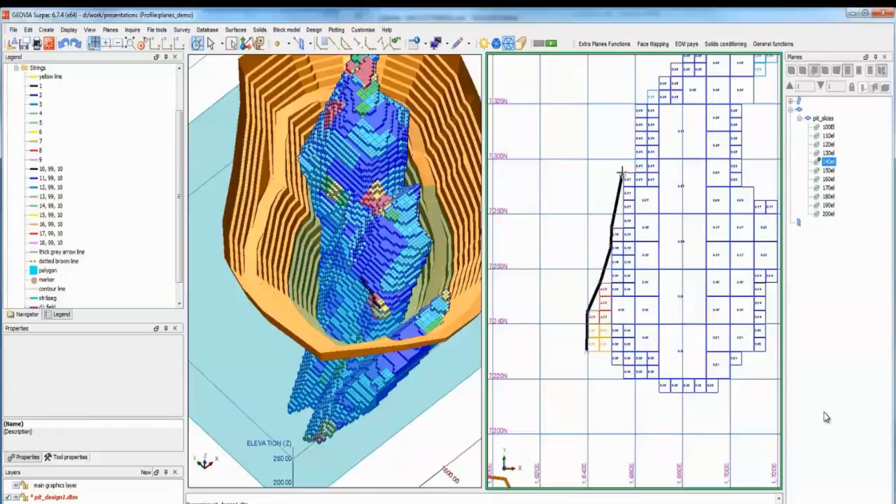So as I keep digitising away, you'll see the update coming through on the left-hand viewport. So it's just another very handy function that you can utilise with our stored planes, just reactivating a stored plane. And then you can see by splitting the viewport, we've got a dynamic update on the left-hand viewport as I work away on the right-hand viewport. 2D mode on the right-hand side, 3D mode on the left-hand side.

So the last of the features that we'll demonstrate today is using planes with autoplot. Once we have defined the planes, we can utilise them at any time to do batch plotting of sections. This final demonstration will show you how this is done.

Okay, so this final demonstration will be showing you how to do batch plotting with planes. And to do that, I'll just drag in a little bit of data, including our database. So in my database here, I'll just display the drill holes with some pattern.

And I'll also display it with some sample table information. So I'll apply that, no constraints. There's my drill holes with the pattern down the left-hand side and some drill hole information on the right-hand side.

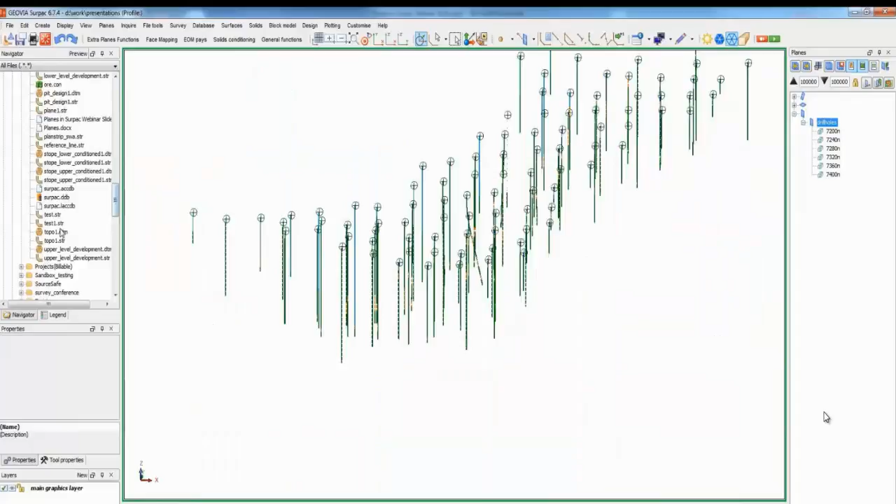So I'll bring in a topo and pit design as well, just so we can have a look at it and how that works with planes.

And if I come across to my planes panel, I've already defined some planes by northing, going from the 7200 north to the 7400 north. And let's just click on 7200.

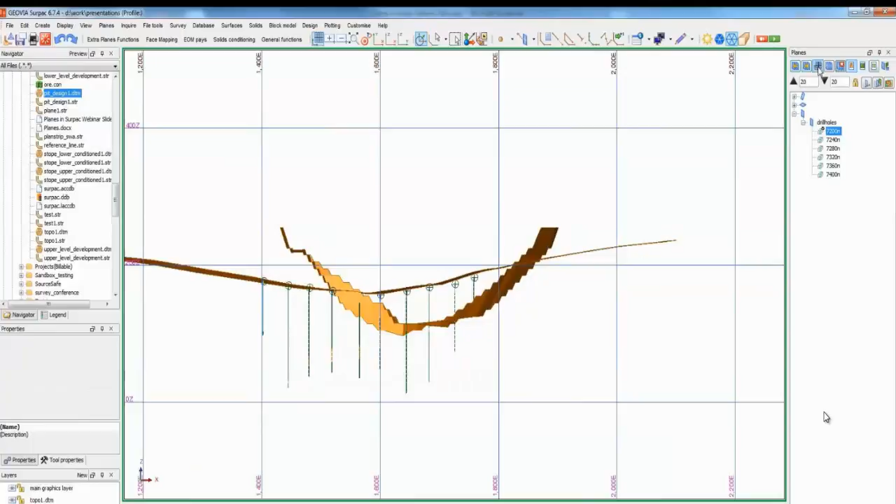Put that in 2D view, and we'll also just draw the polyline through there. So these are the planes that I'm essentially going to be plotting through, 7200 to the 7400 every 40 metres.

And to do this properly, what I needed to do was create a reference line, and that basically maintains the drill holes central to the plot window as I go through my batch sections. If you're unsure how to do that, you can just contact us and we can take you through that process.

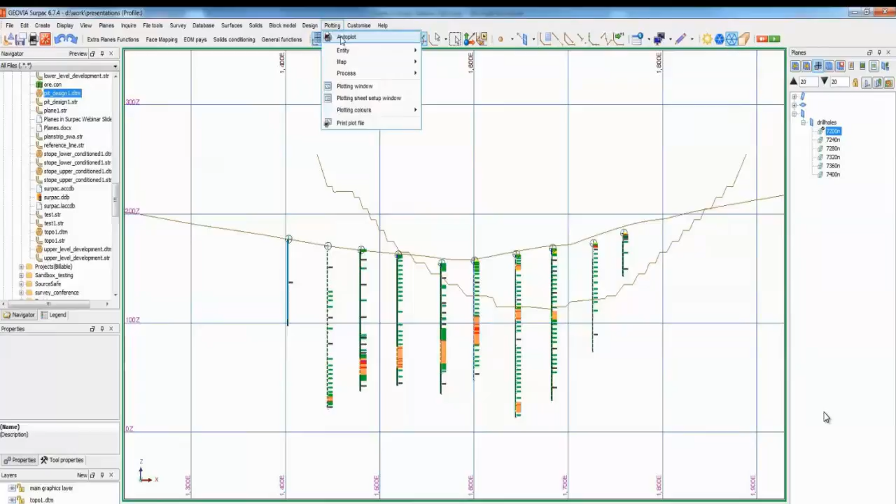So all I need to do now is go into the plotting window, auto plot, and let's give the plots a name. So I'm just going to call this, say, drill hole sections on A3. 1 is to 2,500 will be fine. We'll do a 2D grid and on a normal A3 title block.

And then I just need to set up these two here. So I want a plan strip where my drill hole collars are, and I also want my batch sections. And this is where I can choose which planes out of my plane group do I want to actually plot. So it's optional, but I'm going to plot all of them, and I'm going to have them relative to this reference line, which will just adjust my plot window as it goes through the sections. So I'll press apply on that now.

This is also optional - I can put a title in here, and now it comes up with my plot window. I'll just accept that by pressing F2 and do border ticks my grid lines, and Surpac's now going through and plotting those sections based on my plane definitions.

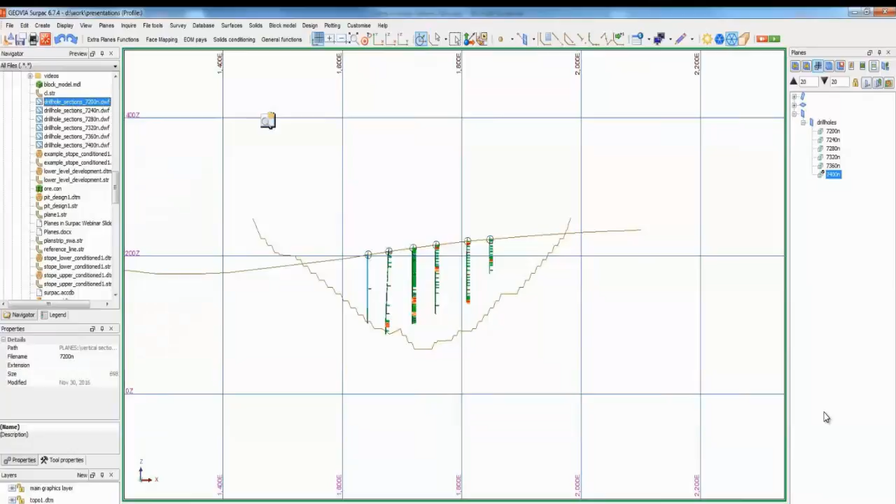That's now done. As you can see on the left-hand side here, I've got my drill hole sections - that's what I called it - and planes has actually appended the plane name to the end of my actual plot file name, which is very helpful. So if I now drag in one of those files and have a look at it, this is basically the final result for the plot.

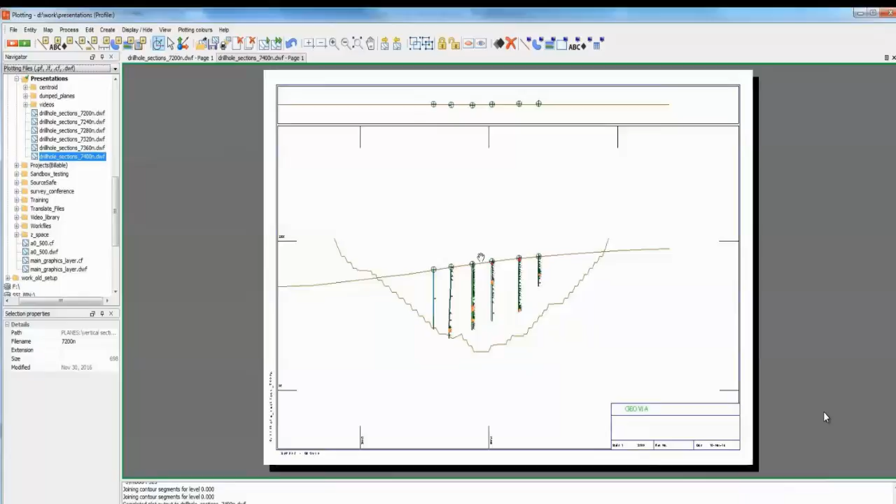Let's have a look at the last one. You can see how the drill holes are still central to the plot, and that's based on my reference string line. So this is just a final demonstration to show you another functionality with your planes.

All right, thanks Ash. Now I've seen some questions pop up from the audience, so we will take them now. The first one is, if I store my planes on the network, how do I get access to them?

Okay, so if your planes are on a network and you happen to be shifting around between computers, I'll bring up Surpac here - you can go to the Customize menu and down to Default Preferences. And in there, you can see there's something called alias files and translations. So one of the ways that you can point Surpac to where your planes are stored is by coming in here, going to where planes is referenced, clicking on this little box here, which opens a browser, and then you can navigate to wherever your planes are stored.

Great, thank you. Another question here - how do I stop someone from deleting a required plane group if they are stored on the network? Okay, so Surpac works with Windows security permissions. So basically, if you do have your plane stored on a network like any other file, it'll come down to what permissions the user has. If they have full read and write access to that particular folder where the planes are stored, then they'll be able to delete the plane definitions. So you just need to work out with IT your user permissions for that one.

Great, thank you Ash. And one more here - how do we pause in between the commands? For example, while using the inclined plane through 3 points, how do we pause in the middle of this operation?

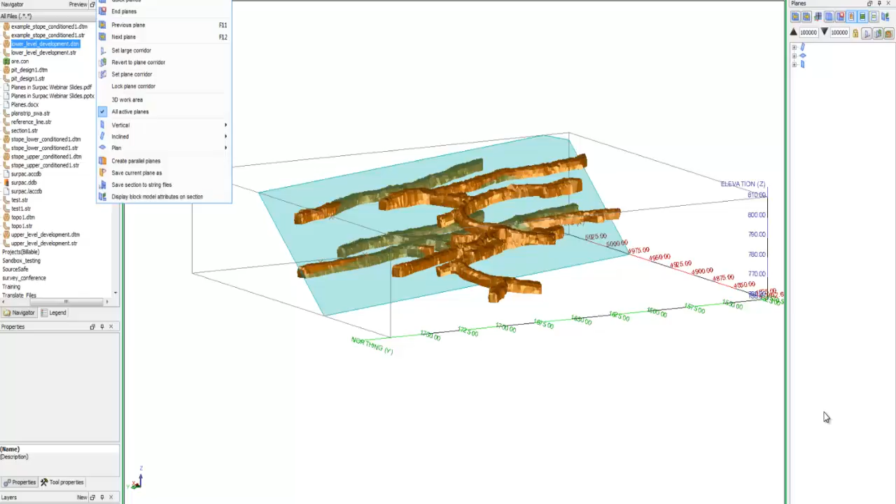Okay, so during the demonstration I covered this, but I'll just run through it quickly again. So if you go down to planes and inclined, and we're going to do by through 3 points - with any of these functions here, if we want to pause it while we're doing it, all I needed to do was press F1. So I'll just run that through again: Planes, inclined, plane through 3 points, or any of these other functions. Then press F1 and you can pause it as you go.